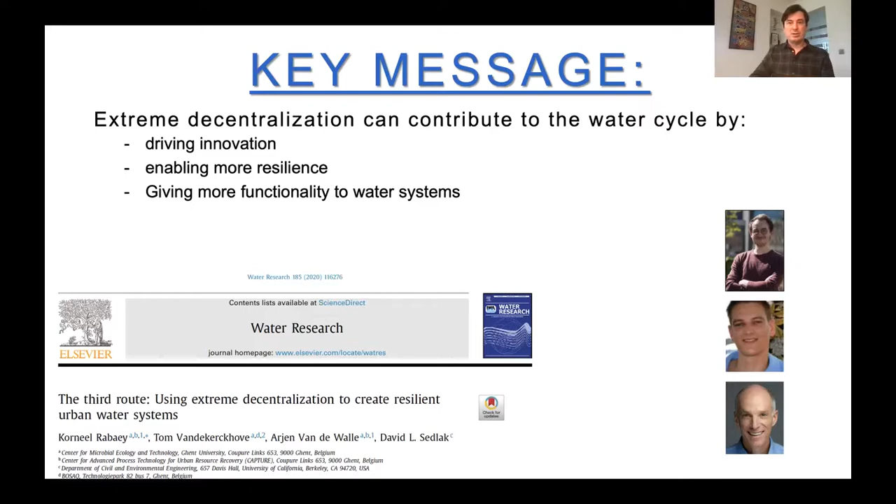Let's get started. If you think about the water sector, and if you're a technologist, in many cases you think of large centralized installations like this one—this is a very big one, the Blue Plains wastewater treatment plant in Washington.

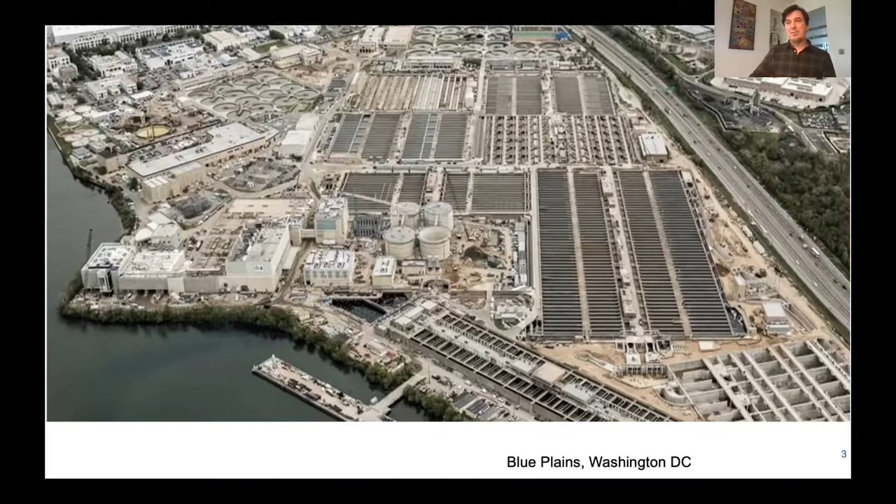Centralized systems like this were developed a bit over 100 years ago, certainly the treatment aspect, and they've been fantastic because they safeguarded human and environmental health—let's not forget that's the first purpose of water supply and sanitation. They've led to more and more efficient water and wastewater treatment, and now enable more recovery options, for example of biogas. But they lead to major investments in transport: water is moved away from where it is gained. Such projects typically have very long lead times, and they lead to slow innovation.

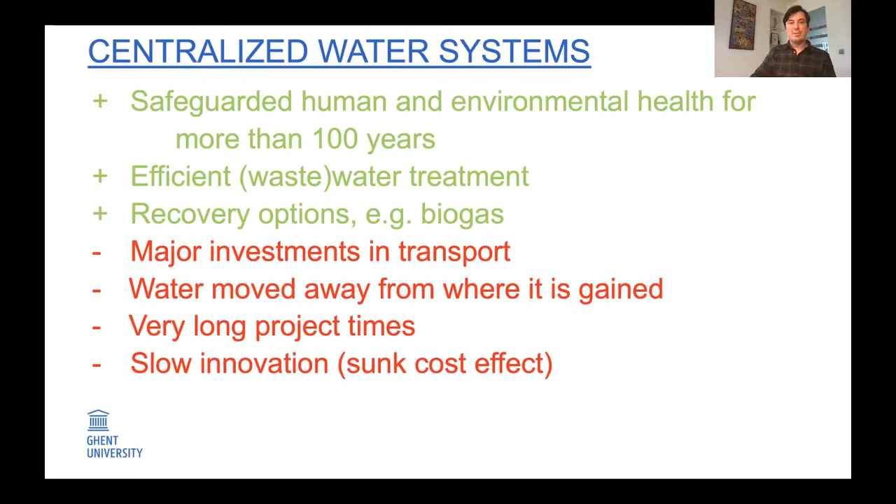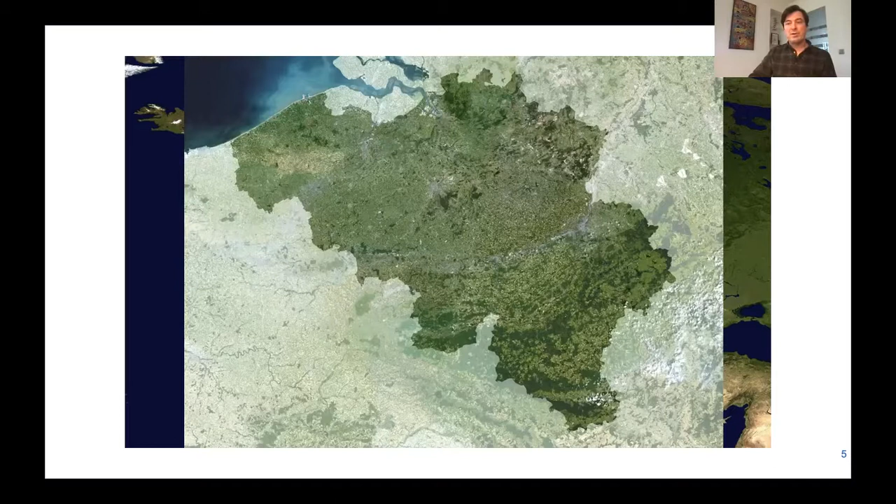I'll go a little bit more in depth on these points. If you take Europe, where I'm located at the moment, and a tiny country like Belgium, we already have many challenges in terms of water. Just the small north part of Belgium, around 12,000 square kilometers, has sewers to transport this water around. Here you see Cloaca Maxima, by the way—this is in Rome, the oldest known sewer.

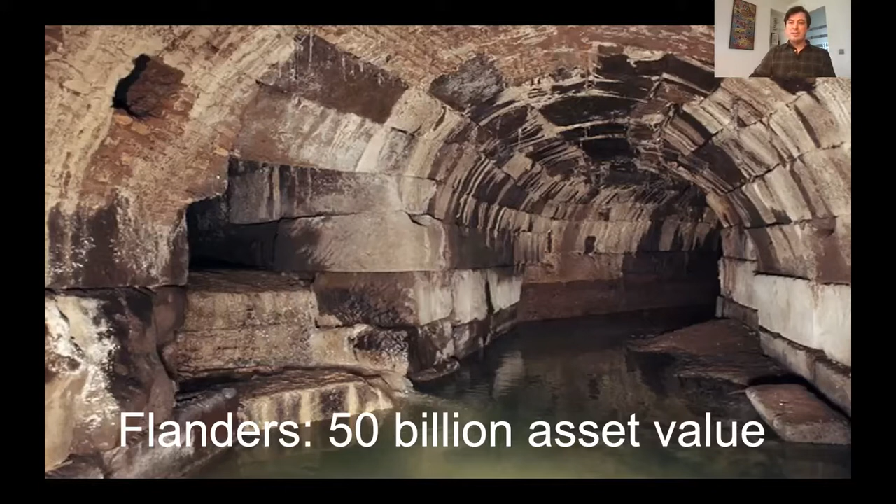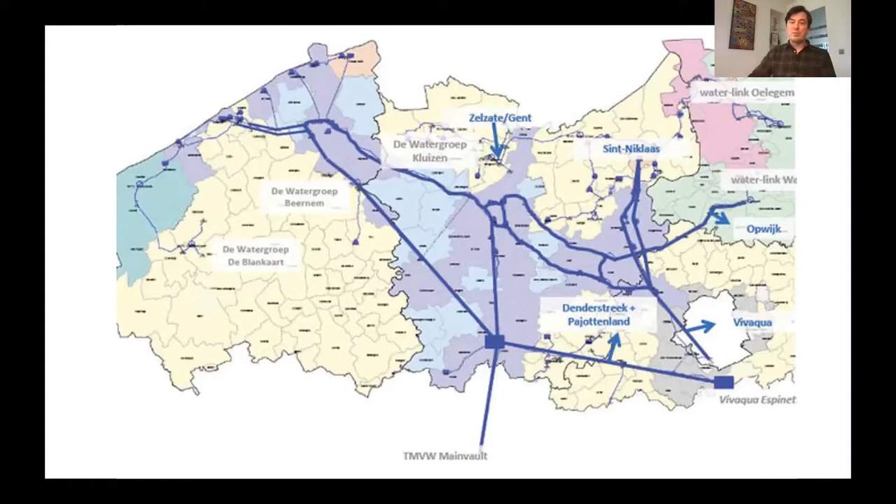They tend to look a little bit more modern in Belgium nowadays, but the invested capital in sewers just for the small Flemish region where I am is over 50 billion euros. That's a lot of concrete underground. And similarly for water supply, in order to get more robustness in our system, we are increasingly connecting within our area, within Europe, water systems, large piped networks.

So water transportation, to enable more robustness in a general grid, is not necessarily a good thing. Potable water is often transported well over tens of kilometers. You use that potable water and rainwater on site, and typically after use discharge it. The wastewater is again transported over kilometers to a centralized wastewater treatment plant typically, and then it is discharged in the river as a point source, almost like a factory.

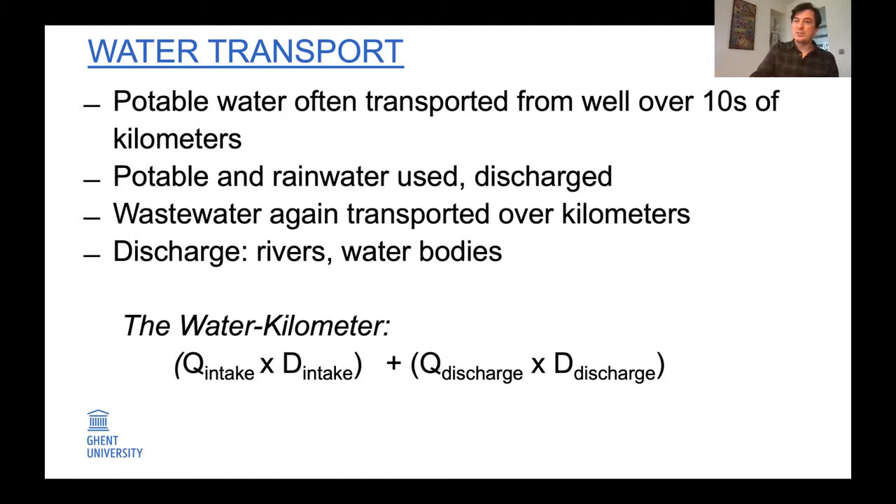So the transport moves the water away from where it is gained as rainwater to where it's in the end discharged. And this has an impact, an energetic impact, and an embedded impact of these pipe networks. This is why we're starting to think about parameters such as a water kilometer, to quantify for the incoming water over how many kilometers you have transported it, and for the water that comes from a building, a house, a factory, over how many kilometers you transport it away again to be treated and discharged.

Now, on another note, the centralized approach also leads to very large investments within a single project. And as a result, although the water sector finds itself quite innovative, I would dare say that we are actually a slowly evolving sector.

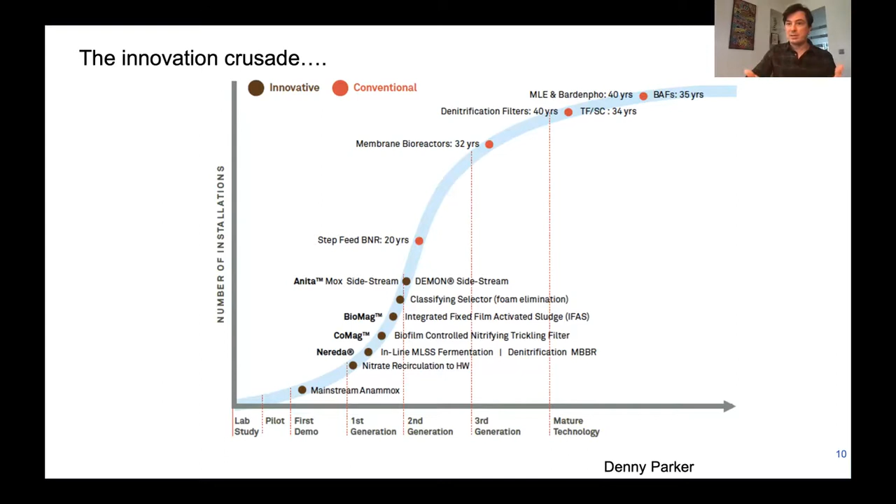Here you see a nice graph made by Denny Parker, in which he mapped out different technologies over time, their maturation from lab development all the way to a mature technology, and how many installations you have. You see it can easily take 30, 40 years before a new technology in the water sector is really mainstream. And that has to do with the very important decisions on large-scale investments associated with, for example, putting on a whole new wastewater treatment plant.

Now, in many places in the world, this is not yet a consideration even, because pipe networks for water and sewer networks may not exist. But also in these cases, the transport of water produced somewhere in a centralized facility to the user can have a large impact. For example, in Kenya, it's calculated that water delivered by a truck can require almost 10 kilowatt hours of energy per cubic meter, which is far larger than the normal energy investment to produce tap water.

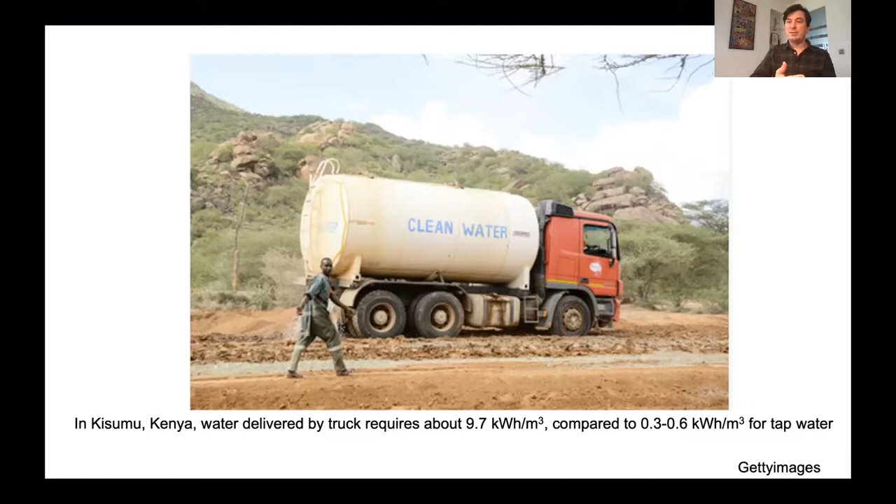So obviously, a solution to this is to develop more decentralized technology that locally produces water, treats water, and thereby avoids the transportation costs. This has, particularly for developing countries, been a very popular approach. So I am not reinventing an approach here; many books, much literature already exist, many implementations for local water production, local water treatment. There are also programs such as the Gates Foundation Reinvent the Toilet Challenge, where we go one step further, where really localized, fully integrated treatment systems are under development.

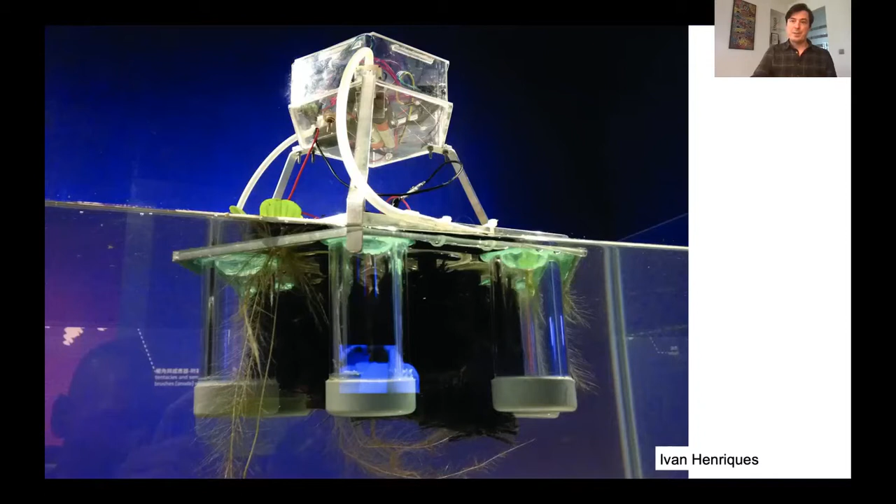Now, what I like about that Gates Foundation approach is that it forces you to think. You think in terms of challenges on where you want to be, rather than starting from existing technologies. This is very similar to me as to how an artist works. We are very fortunate with our team to work with artists. Here you see, for example, a robot that is powered by the waste that is in water, to float around, to move around and clean up more water. Similarly, a beautiful design by Teresa van Dongen, another artist we work with, where a lamp is powered by degradation of organic matter. So artists come from a perspective of where they want to be and design for that.

While a risk that has come through our development of centralized systems is that we think according to what they call the sunk cost effect. We are so attuned to large-scale technologies that actually, if we think about decentralized treatment technologies, we tend to just make smaller technology of what already exists. But it doesn't need to be just smaller technology, and similarly, decentralized technology doesn't necessarily need to be the cheap or cheapest technology, because decentralized technology can have also other purposes relative to centralized technology.

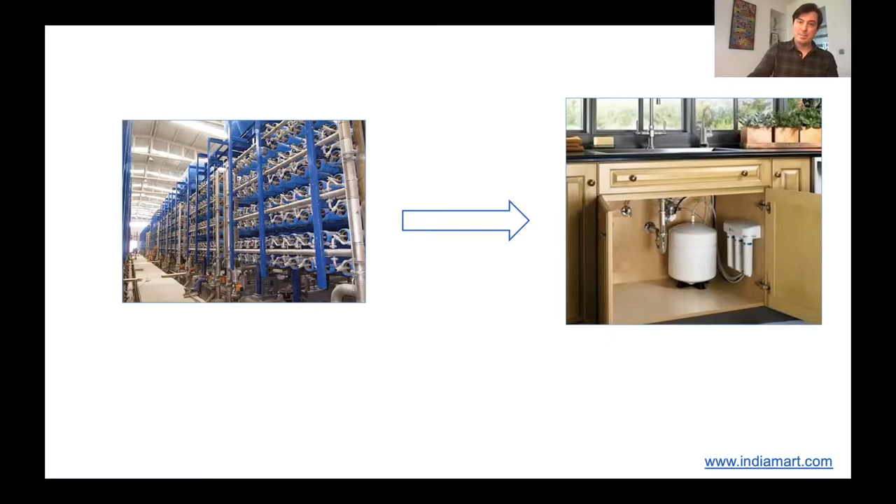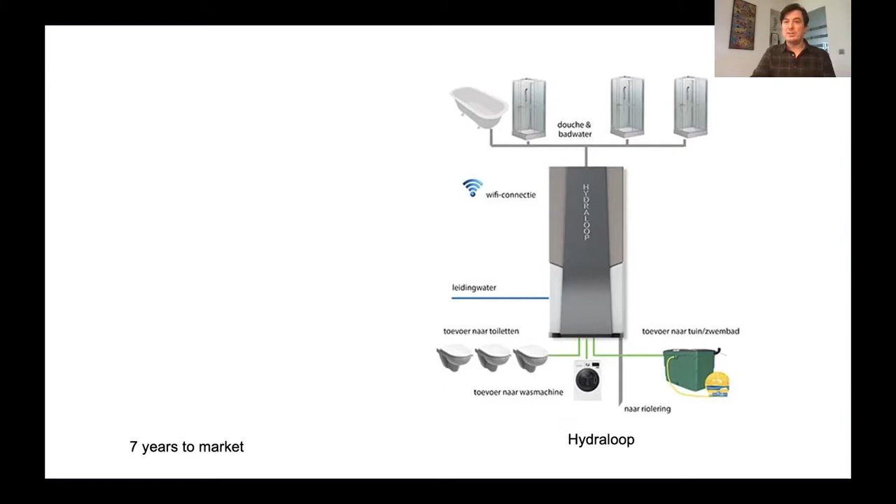Not working on drinking water, but on grey water. There's this example, the Hydraloop system. This is a Dutch company that develops a quite straightforward reactor that takes the grey water in a house, so you need a separate pipe network for that, treats the grey water so you can reuse it to flush toilets or to bring it into a garden. Now, it's nice, this is a small technology, and if I get it right from the information I get from the company, it took about 7 years to get to the market, which is very different than the 30 to 40 years we discussed before. And because a company like this can roll out now many hundreds or thousands of these units, innovation may actually come very fast.

And the third point on the purpose. You see the evolution of new systems like here on the left-hand side, Robinetto, on the right-hand side, Brita. Robinetto makes a system that in buildings, predominantly, you can have a water tap. You can change the properties of the water, the flavors, the experience of the water can change. So we can work with septic tank-like approaches, which was the main sanitation approach so far. We can work on grey water, and we can work on drinking water with small-scale technology, which admittedly today is more expensive.

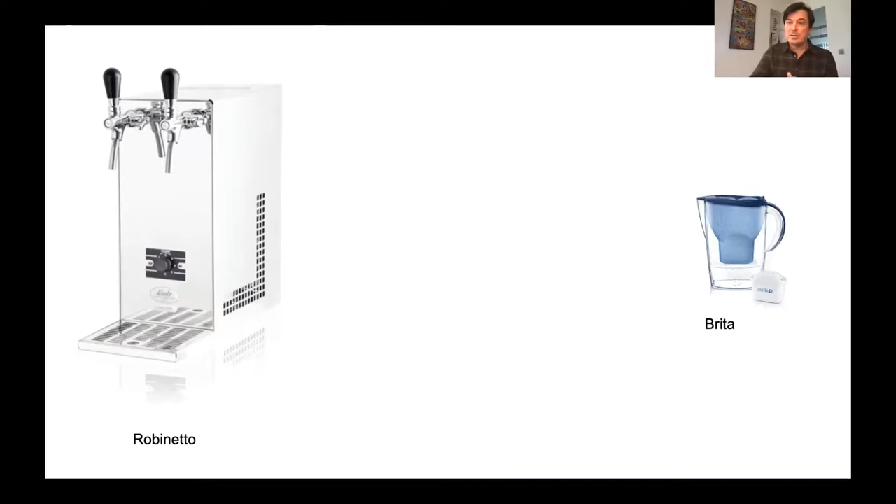But you can wonder what the willingness is to pay for the customer. Now, an important thing in willingness to pay is also where these water systems at a decentralized level will bring you. And I want to talk a little bit about unpublished work of our group, of Arjen Van de Walle, where we've actually done a lot of simulations on home-based, single household-based water treatment systems.

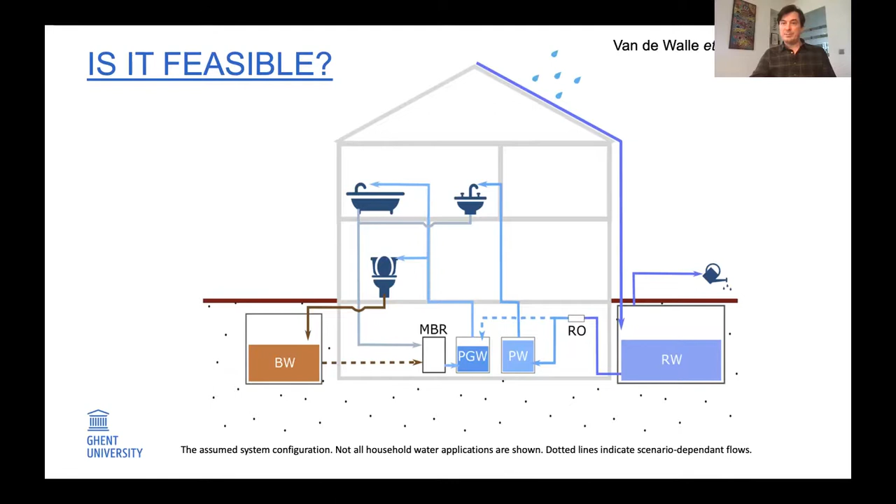And we looked at how we would be able to fully make a house water independent. And so what you realize if you go through the simulations is that if you have some storage, you can quite quickly produce a lot of water in the house because you have an input of rainwater and actually quite good technology to reuse already.

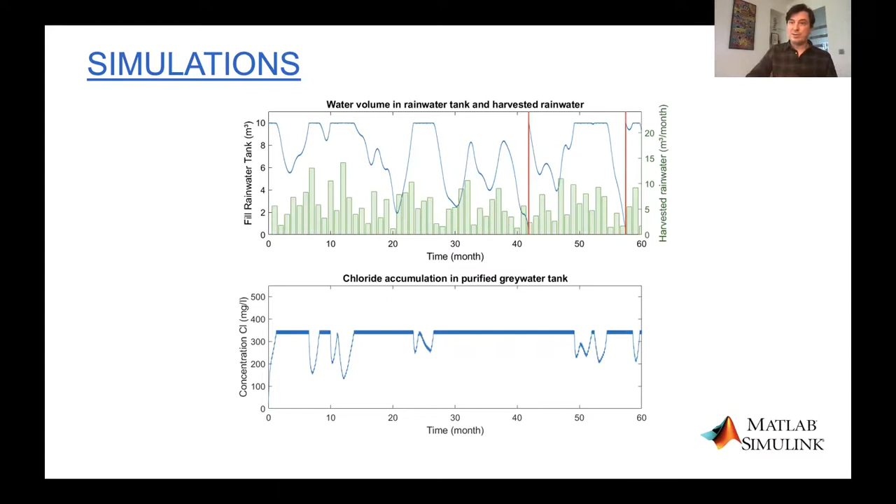Now, one thing is that if you start doing these calculations, you see new challenges coming up. If you're going to reuse water at home level, contaminants may accumulate. For example, here you see over time, in the bottom, the chloride concentrations in water if we start reusing it.

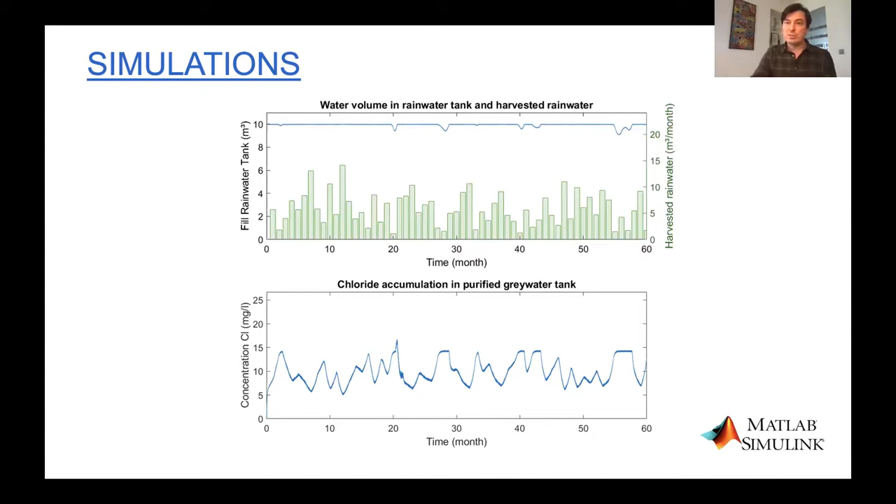And we reach a limit of about, well, a standard of about 350 ppm quite easily, making the water less suitable for use. But if you do more interventions and start purging excess water, you have to get rid of water anyway from a building, then you can see that you can maintain very low salt concentrations and deal with contaminant accumulations over time. So even with a quite small buffer tank here, we managed to, at least in silico, close a water cycle at single household level.

And then you can start creating performance indicators. We can say, how independent do we make this house? An independence factor. How circular is the house in terms of water? How much do we recharge to our local environment of that rainwater that initially fell on the house? And how tolerant are we to extended drought periods? And this allows you to compare systems and to start really making an assessment of how robust, how resilient our water system is getting through such interventions.

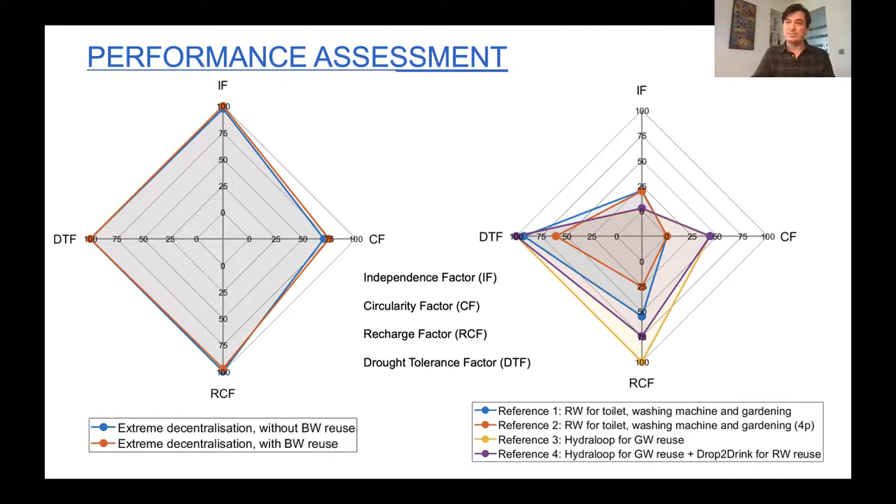We're not there yet. We have a long way to go, I believe, before homes would, in an economic way, be water independent. But to get there, we can learn a lot from other transitions. I've already discussed that we have to learn also to think differently. A smaller technology is not necessarily the same as a larger technology.

But we can also learn, for example, from photovoltaics, where the approach to work with very small panels and then roll out millions of panels through a very well-planned strategy led to very fast decreases in the cost of photovoltaic power. And similarly, you can anticipate the same trajectory if we have the vision for small-scale water systems.

Important if you want to get the societal drive for such smaller local water systems is also that you have to engage with the customers. And the first customers who buy systems, they invest in sustainability or another aspect, and they want to be recognized for that. A system has to be visible in order to be successful in a first phase.

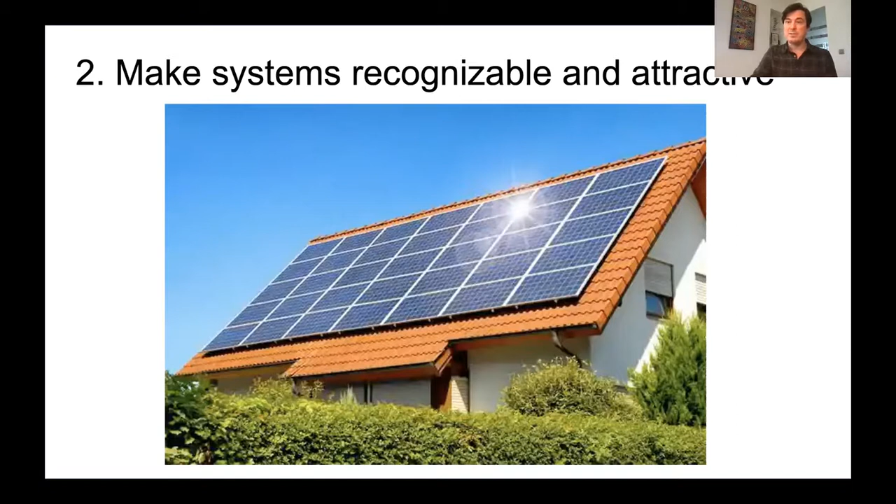But water systems also need to come closer. Water is a very intimate product. This allows you to actually communicate via your water system with the user of the water system and engage that user in also developing your system. This is what is called customer-driven innovation.

Smartphones are a very nice example of that, because when you buy a smartphone, you interact with this device and think of new good solutions, applications of this system. You and others are able to make new applications via apps on this platform that create that extra functionality. So we can think in the same way about water systems. Can we have consumers closer interacting with their small water system and thereby contribute also their creativity to it?

Very important also, if we are going to work decentralized, we should not be trucking around large amounts of chemicals towards the different treatment or production sites. We will have to go electric. Going electric minimizes chemical addition to the water, minimizes residues, but is also becoming very cost competitive.

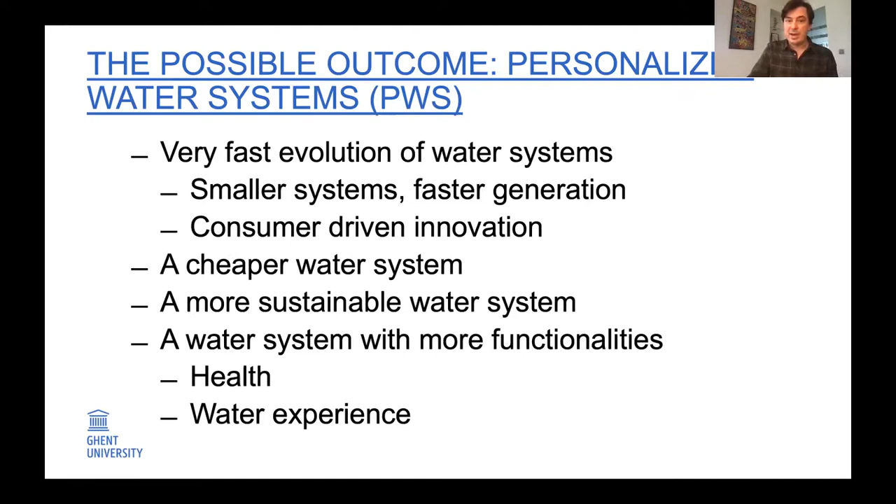Aspects such as adding pre- and probiotics to the water, tailoring the water, for example the mineral content of the water, to the user's taste or health requirements become feasible. And you can also address new expectations on the climate footprint of your water system, and you can really turn it into a consumer product—not the kind of nonsense of electrified water of the past, but truly water that has health-promoting benefits.

Logically, you'll have questions with this. Is this safe? Well, I think there's going to be a presentation after mine on water and data. We will have to monitor smaller systems, but it is possible now, via the Internet of Things, to monitor small-scale installations, and bear in mind, if an installation fails, the scale is very small.

You may wonder whether this approach is ethical, because yes, more affluent people will get better water, whatever that means, at least in the first phase. But photovoltaics shows that principally such an evolution can be ethical if, in time, these photovoltaic panels, those water systems, become available for all at an affordable price. It's a bit similar to behind-the-counter services for which people are already making choices.

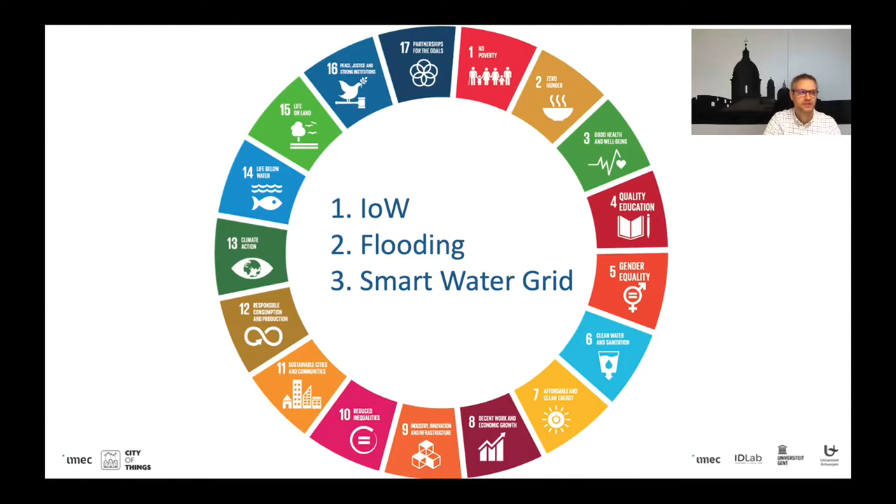Now all 3 projects, the Internet of Water, flood prediction and smart water grid, fit into several of the United Nations Sustainable Development Goals: clean water, responsible consumption, sustainable cities and climate action, to just name a few.

Now, the first project is a project of the City of Things Living Lab of imec. On the photograph, you see a bird's eye view of the city of Antwerp, which harbors one of the biggest ports in Europe. In a dedicated area of the city, a few square miles wide, we rolled out a living lab, which is called City of Things, to test all kinds of IoT related projects.

Within this living lab, we are using digital technologies and researching the way in which the Internet of Things technology can provide solutions to cities and regions for any urban issues. One of the projects that fits this is the Internet of Water.

At the moment, there are major water problems in Flanders due to climate change, as it is the 4th year in a row that we have a drought crisis in summer. Over summer, the drought committee is constantly discussing whether the orange code will apply so that governors can take measures themselves and invoke a water capturing ban for all citizens.

Now, in order to better deal with such problems, a fine-meshed measurement network is needed so that evidence-based and well-founded decisions can be made. In this Internet of Water project, we mainly worked on salinization and discharges into surface water.

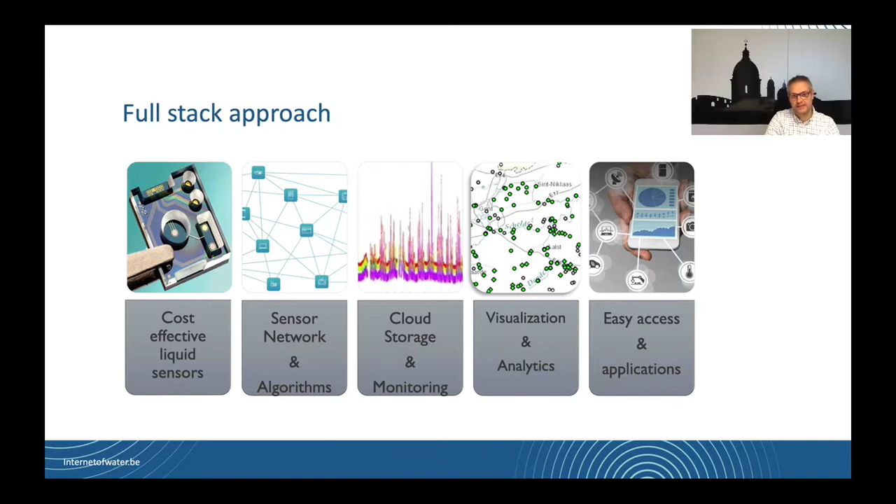Let's go quickly through a number of working groups that fuel this project.

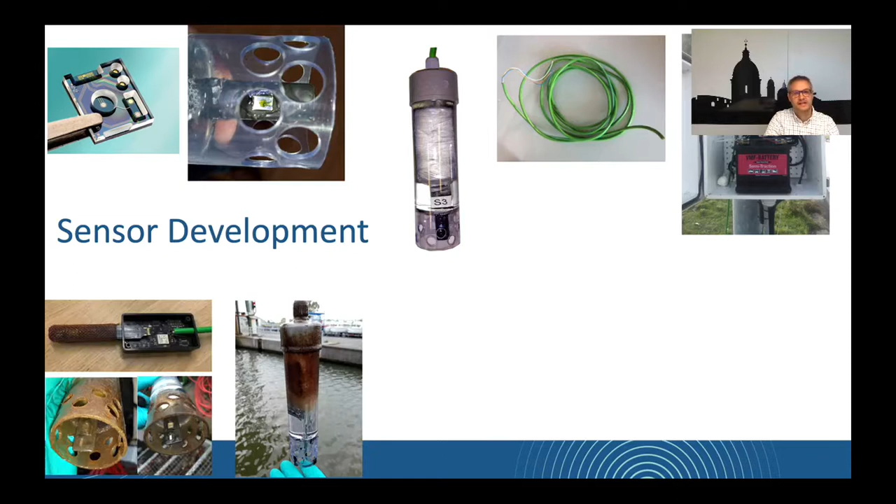So what kind of sensors do we use to develop and test the different kinds of housing? We use conductivity sensors, temperature sensors, acidity sensors, and ultrasound sensors.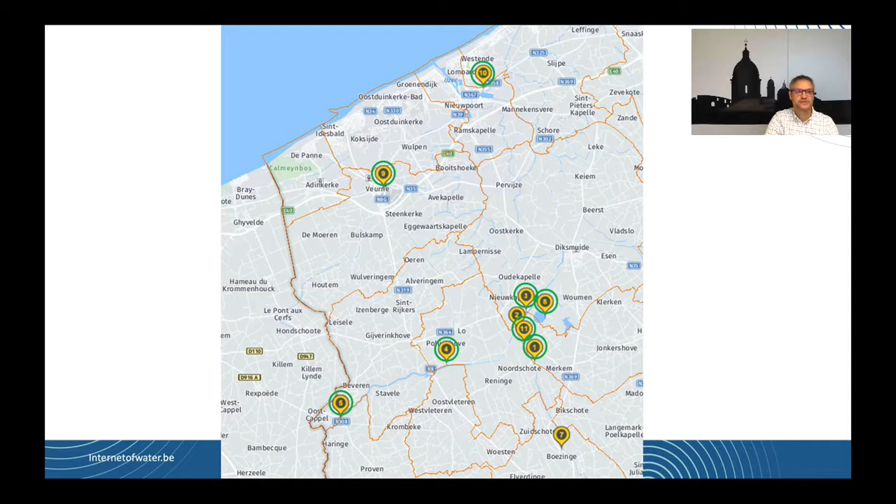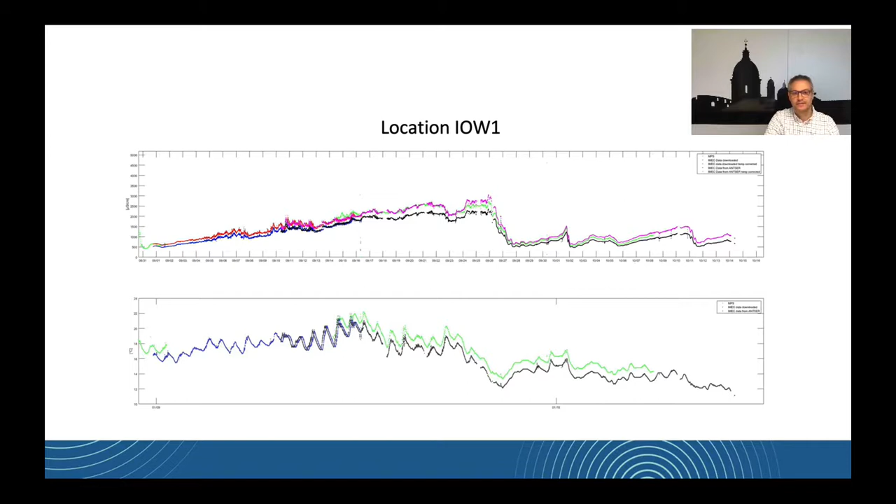Here one can see sample readings of both the conductivity and the temperature sensors at different measurement venues.

Now, how do we deal with IT infrastructure and models? The work group IT indicated what components and functionalities were required for such an IoT platform to work end-to-end.

We need an IoT agent, which is based on the NGSI proxy agent. We need a context broker. We need a time series database for the sensor data, a metadata management platform, for example, to put the location model in. We need different APIs.

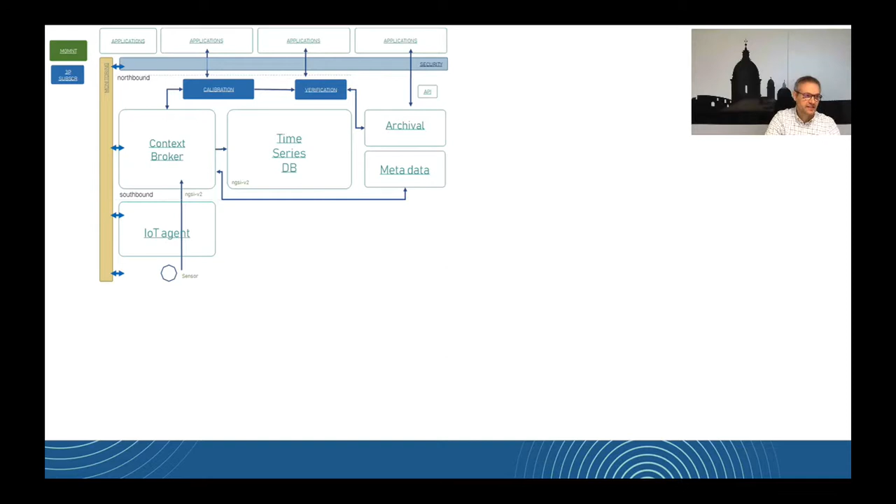We need verification of algorithms for drift countering, and we need some basic authentication and monitoring building blocks. The approach is aligned with the principles chosen at the start.

So the context management, the metadata and device info is needed at the beginning of the chain, and in the end we link it towards European approaches as a basis for the data-first strategy as defined by NGSI, amongst others, with this CEF context broker.

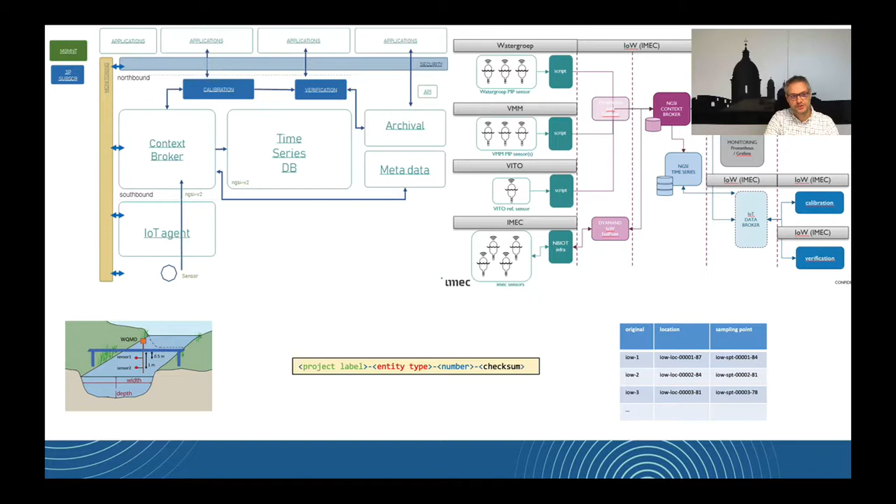Now, how do we test and install stuff? We started by determining a number of locations to conduct our first test. These were determined in consultation with the consortium, and we included different location types, both surface and underground water.

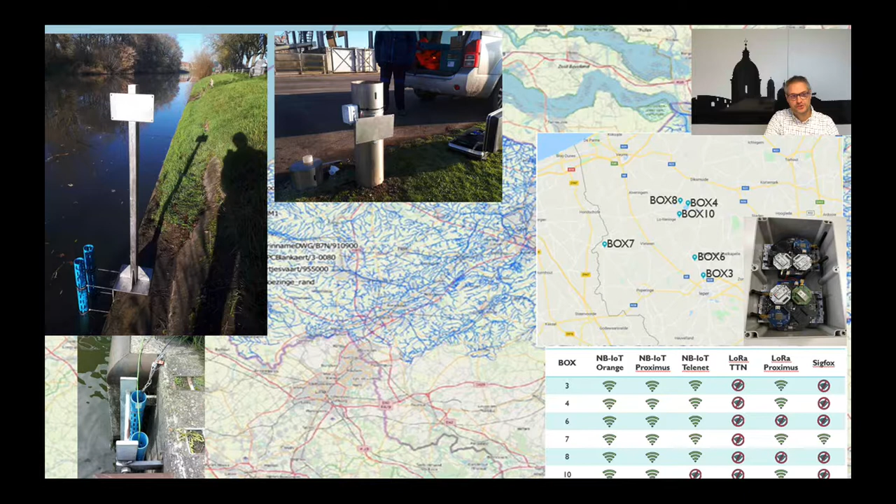We are using two sensor tubes each time, one with the new imec sensor and the other with some reference sensors. And we applied the same general operational procedures on all sensor venues to set up, calibrate, measure, and clean the sensors.

Communication and stakeholder management. Well, there the usual suspects for dissemination are used: conferences, website, newsletter, Twitter, LinkedIn, and we have also a dedicated YouTube channel.

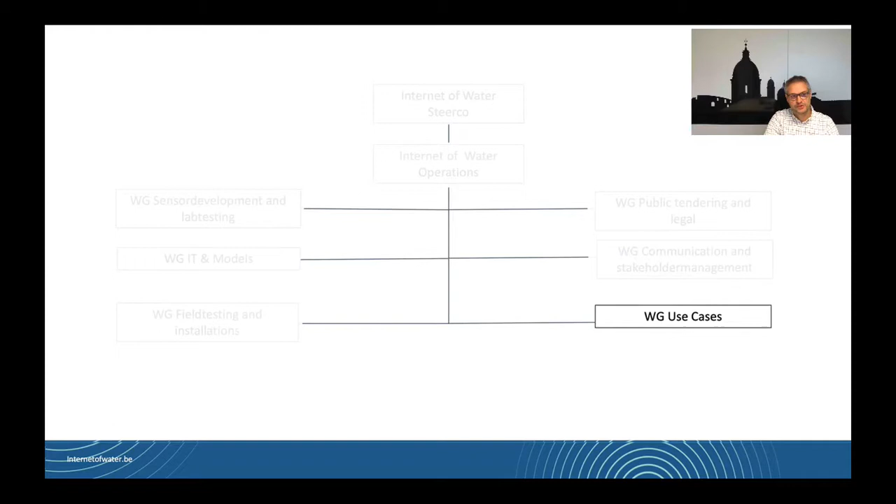Now, what use cases have you already worked on? Sensor locations are being defined in collaboration with the consortium, as said, but also with a broader group of stakeholders.

Now, based on these conversations and the input from the consortium, an approach has been defined to create a first list of locations, which is based on two criteria, namely general technical criteria and specific use case criteria.

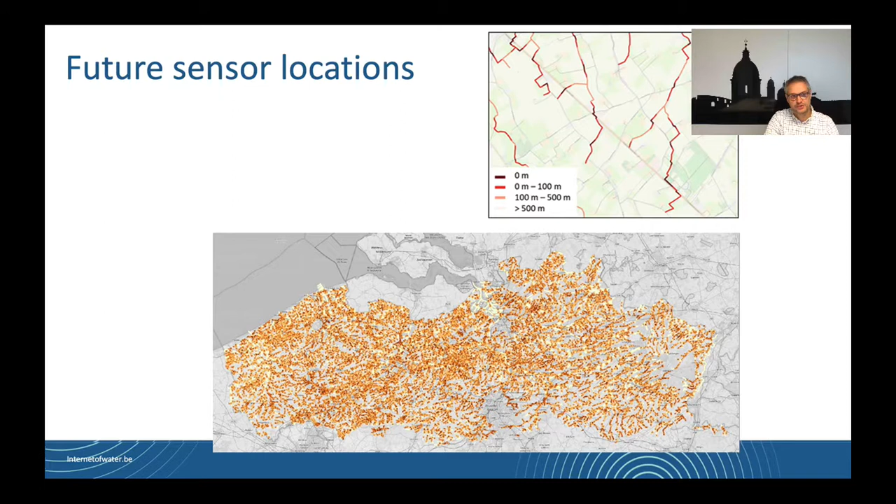For the general technical criteria, we got input from the Internet of Water partners. Namely, we primarily asked ourselves, where can a sensor best be placed? We made a relative ranking based on technical suitability and accessibility, and also the accessibility of the mobile network coverage for needed data transfer was very important in determining where to put the new sensor locations.

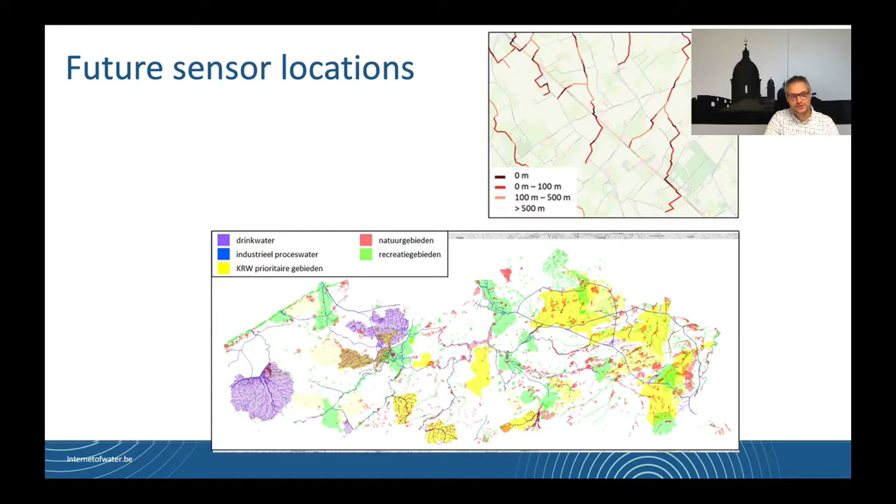Now, there's also use-case-specific criteria. Again, input from the Internet of Water partners and stakeholders was taken into account, and some relevant, meaningful areas of locations to measure what we want to know. Also, what do we want to measure for what reason?

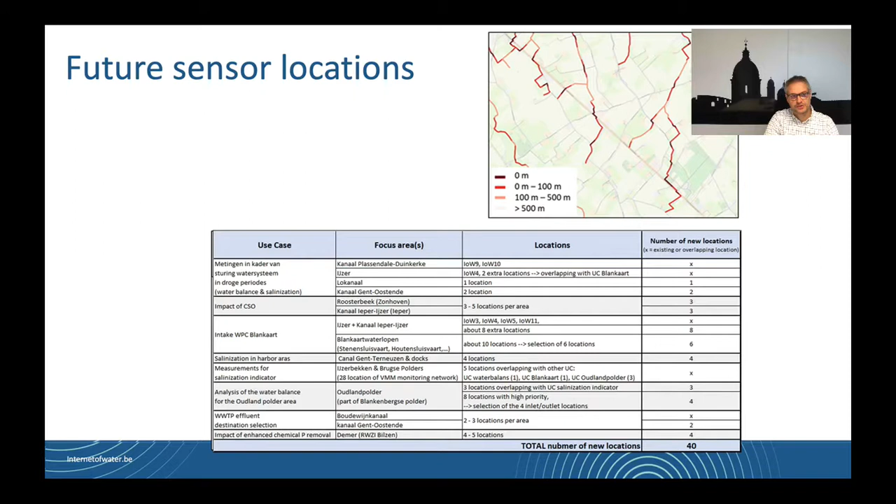And again, we made a relative ranking here based on substantive suitability with a focus on the use case of salinization and discharge in surface water.

Here you can see that we use machine learning techniques to move from point measurements to predictions of river water quality. This example illustrates how we can deal with data from Internet of Water, for example, to create a dynamic salinization map of the coastal region.

The dynamic salinization map shows how salt water from the sea flows into and retreats from the hinterland throughout the year. In the summer, the salinization problem, the intrusion into the interior, is greatest due to the drought, of course.

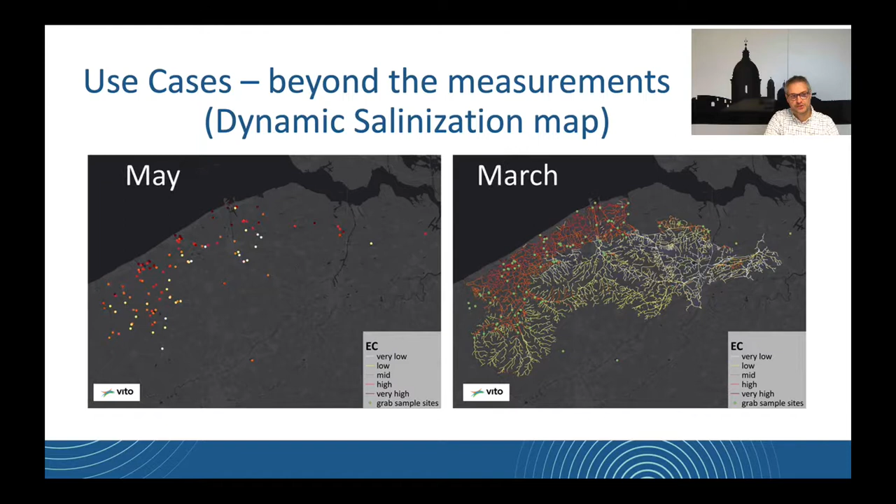The predictions here were trained on the basis of existing stakeholder measurements from the year 2019. Imagine what we can do if we can have hundreds of sensors in this region to supply us the data towards our developed digital twin for predictive simulations.

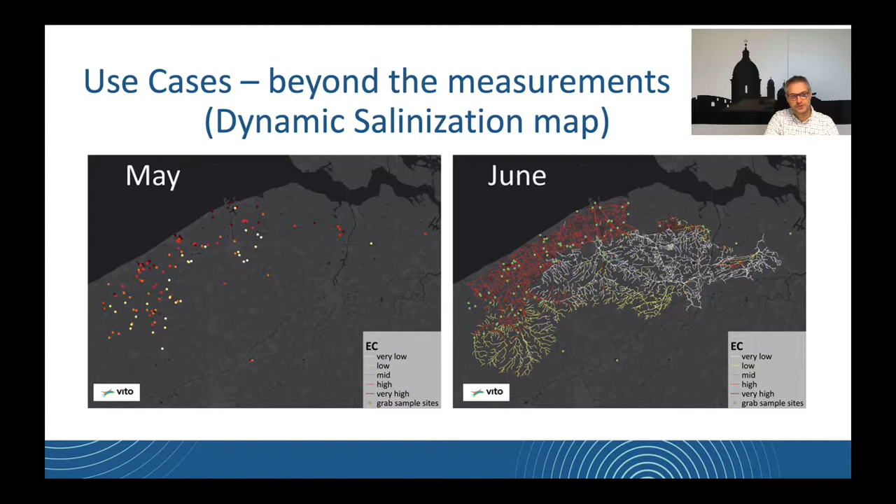You can find more and the latest info on the Internet of Water project on the aforementioned website.

Now on to project number 2. The same city of Antwerp is vulnerable to flooding, as most of the ancient city lies below the harbor waterline and is only protected by quays and some storm surge barriers. But every now and then there are exceptional big storms that bring extra high waters from the sea to the river Schelde, called storm tides, and flooding is very much possible then, certainly if also heavy local rain adds to the problem.

So the objectives for the different stakeholders are the following. For the fire department, we need fast and correct 3-hour estimates of the water level on street level. And for the sewer department, we need proactive monitoring of sewage data and corresponding pumps to stop working at the event of a calamity.

Now, based on real water levels in river and sewer system, and on top of that, we also need real-time rainfall sensors. Our algorithms process these real-time fused sensor data streams together with historical data on calamity events and their corresponding sensor readings. And of course, we also use the forecasted rainfall from the national weather radars.

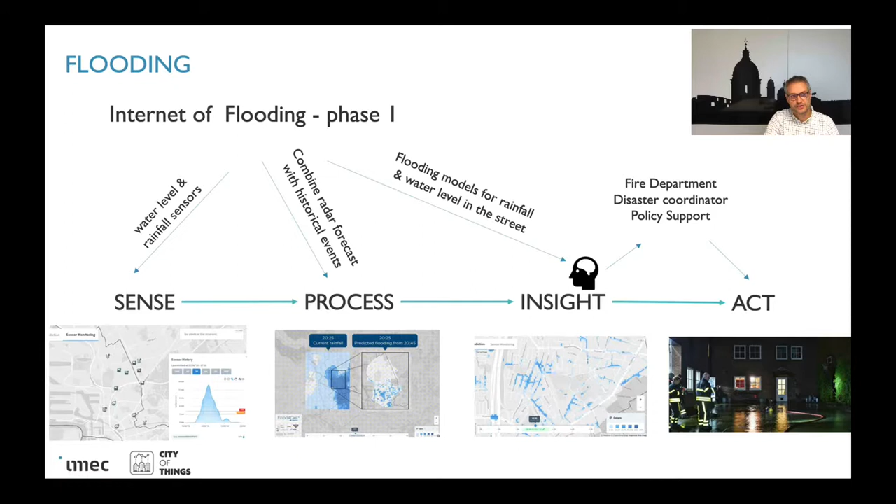Now, to provide predictive flooding models and water levels in the street for the next 2 hours, these algorithms are needed. Thus, the needed disaster teams of both fire brigade and sewer management company can act in a timely manner if things happen.

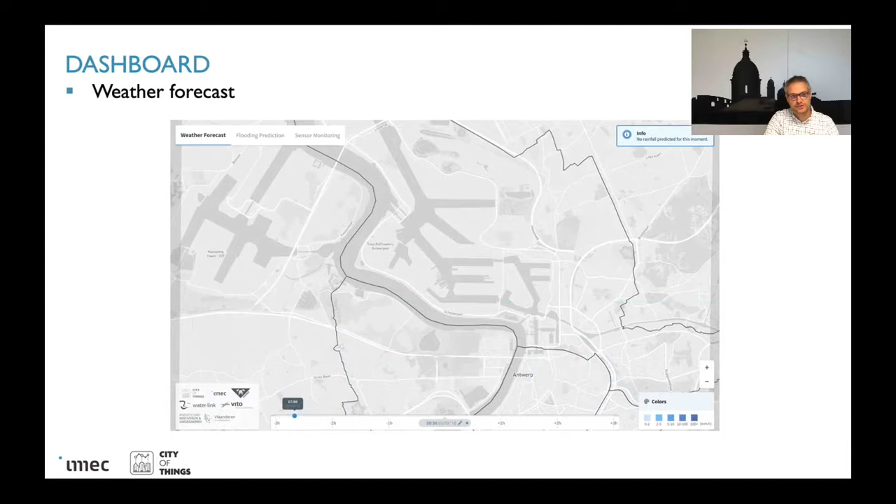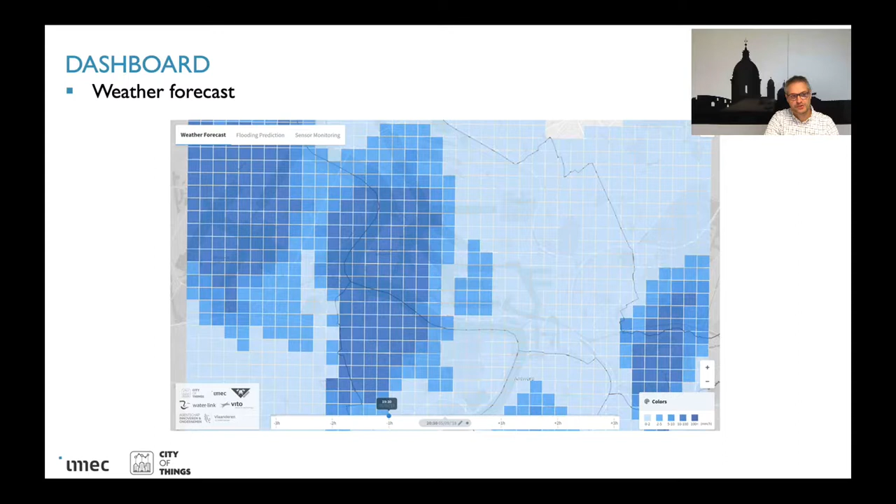Now, all the info ended up in some visual dashboards where both weather forecast, flood prediction, and sensor monitoring are combined. This, for example, is the estimated amount of rainfall in millimeters to be expected in the next 3 hours, which in turn gives an input to the trained flooding models, which in turn predicts where problems might occur on street level during the next couple of hours.

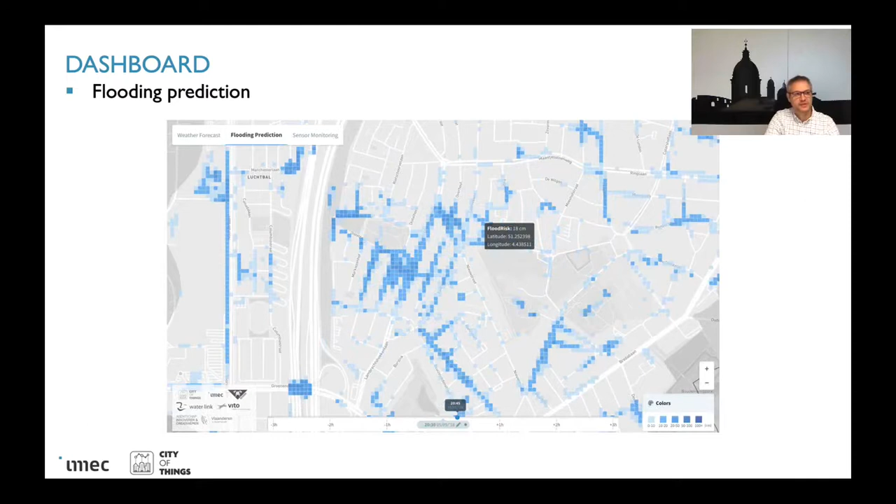As you can see here, the more blue it is, the more chance it is flooding will be there in these streets. As you can see, in this street, 18 centimeters of water is expected 30 minutes from now, based on all the sensor readings and the data at hand.

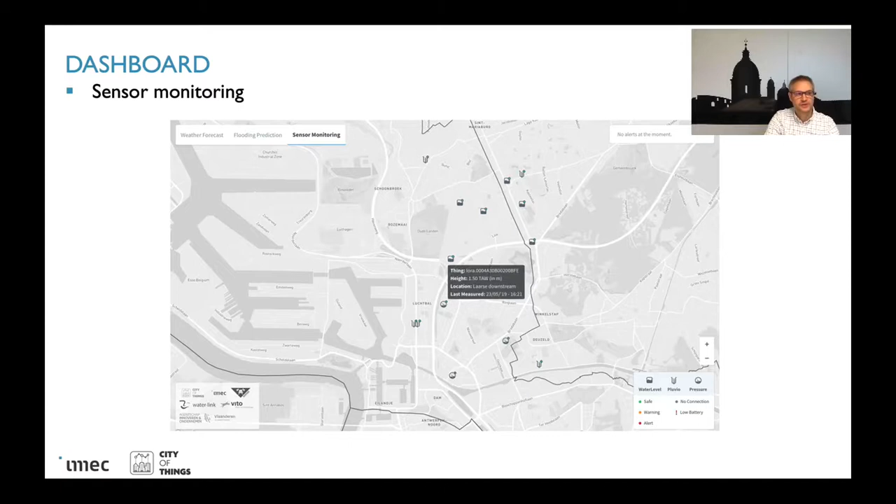As an added feature, also the current status of all the sensors can be monitored as well with the same backend of our system. Here, the pressure sensor is currently doing all right, but history shows water levels were higher than normal the last couple of months in this particular measurement point.

Phase 2, there we will model to predict proactively the impact of showers in the street over 3 hours over the complete operational zone of Antwerp. And this will include modeling with feedback, namely, what can we learn if we compare the data of the application with the data of the real historical interventions? Is it possible to not only predict the impact of water, but also the impact on the citizens? And are there more predictive correlations that arise?

Furthermore, we will be able to fine-tune the thresholds for preventive alarming based on the impact on a certain area rather than the intensity of the showers themselves. Also, research on how the output of the model can be used to determine external communications around floods, because miscommunication can lead to distrust from the population, and this support needs to happen with very high reliability.

Last but not least, we will also try to link it with other city services, emergency planning service of the city of Antwerp, urban planning services, or even we link it with real-time mobility services.

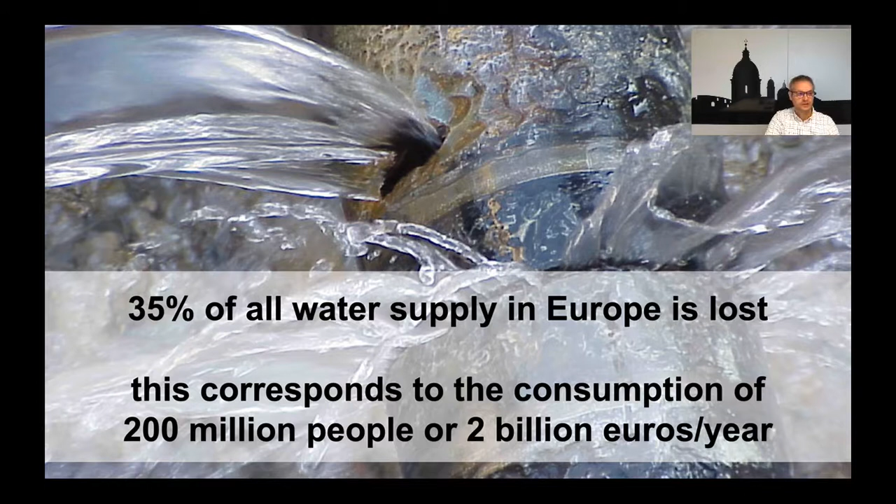You see the quote here. In Flanders, it is a bit better, but still awfully bad, as 20% of all our drinking water is lost due to underground pipe leakages. And this costs a lot. Not only that, it's not the water loss and the costs itself, but if unlucky, these leakages can lead to further damages in the infrastructure, as can be seen here.

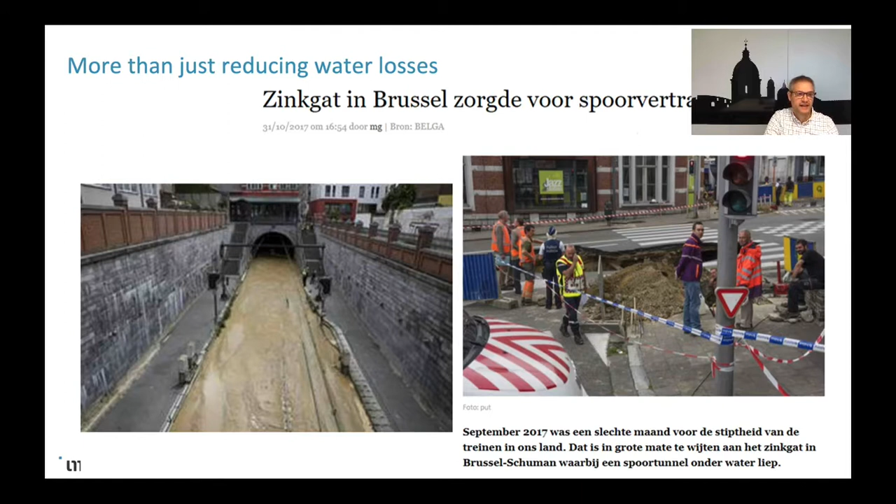A rupture of a water pipe was the reason that a train tunnel was flooded for over a week in Brussels in 2017, causing all kinds of economical, ecological, and societal havoc at the time.

Now, where are we today here in Flanders? We can detect leaks in this zone, but the alarm that goes off is for a really huge zone, 70 kilometers wide, which in worst case scenario, a lot of human effort is needed to detect and fix this leakage.

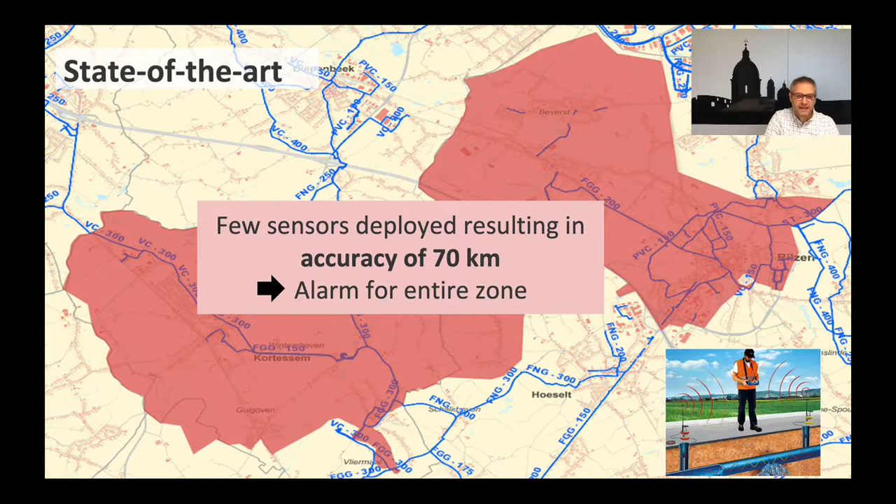It could take weeks or even months to really detect the faulty pipe. Now, if we could narrow that down to street level, which means less than 1 kilometer of piping that has to be researched, well, a lot of positive vibes could happen.

The search time to find the leak is just a matter of hours now. There's less hinderance for the end consumer. There's a faster service, there will be increased quality, and there will be increased consumer confidence in the end as well.

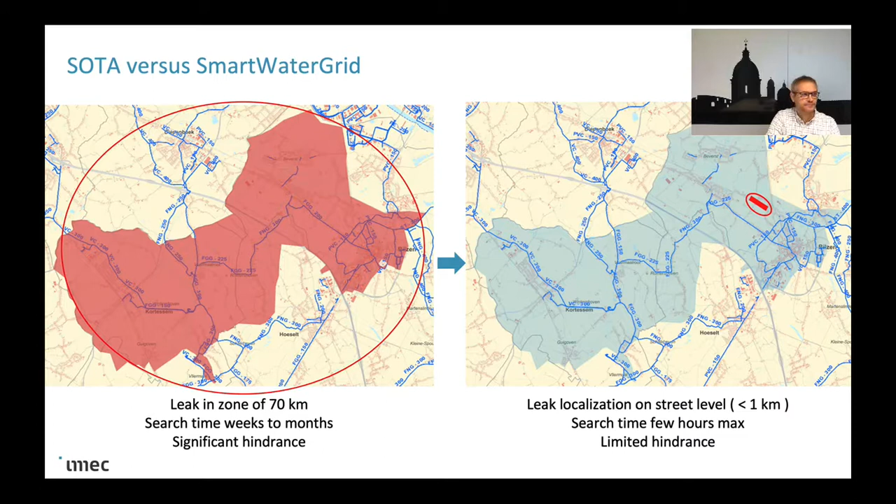Now, the solution to come to such a fine-grained leakage detection system is twofold. We are building a digital twin of the real-world situation at hand, where the AI model is fed with real-time sensor data to see if it holds to the prospective theoretical hydraulical models.

Now, these hydraulical models indicate how water flows, and their calibration is required, and it is only for one particular flow scenario. So to maintain these hydraulical models becomes very labor intensive for many scenarios. So this is where machine learning will speed this up, as it can calculate many scenarios easily in parallel. And it will make these hydraulic models also more accurate.

On the other hand, with machine learning alone, without these hydraulical models, it would require too many sensors in the field. So the combination of the two, having a hybrid twin, is really ideal and will be the real value.

On top of that, we also want feedback from the end customers that will be used as a virtual sensor to improve the hydraulical model as well. This kind of multi-dimensional hybrid twin has never been done before, so to optimize all 3 dimensions at the same time will be a challenge.

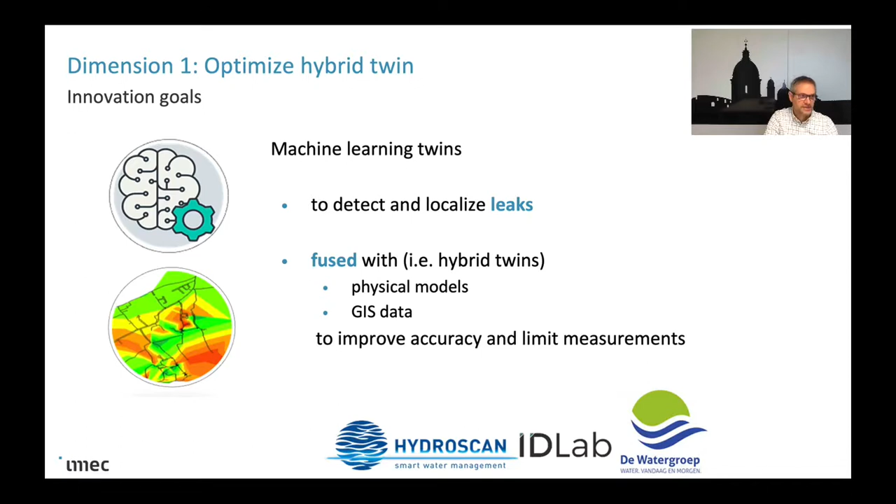As said, research dimension 1 is all about the just mentioned hybrid twin to detect and localize water leaks with better accuracy and with limited measurements needed. A second research dimension is about developing new wireless sensors to better fuel this hybrid twin with real-time data about conditions of the water pipes.

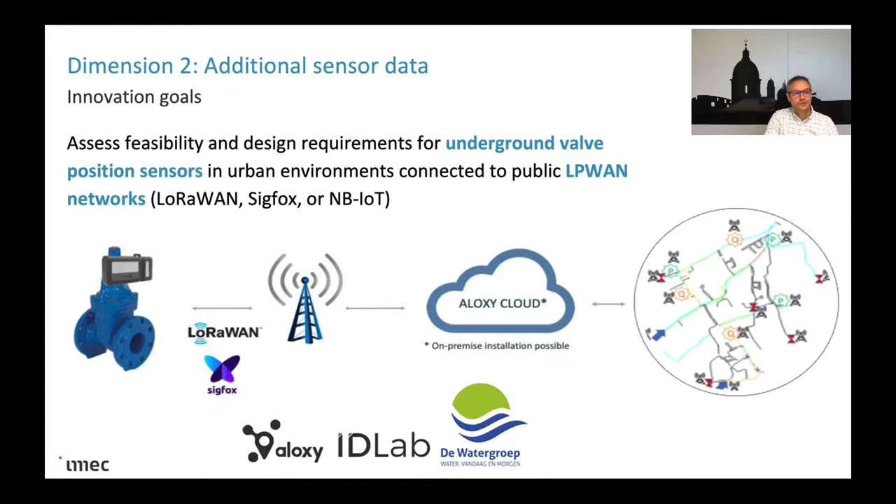Here we will investigate how wired water sensors can be adapted to communicate wirelessly using LPWAN technology, including potential pre-processing in the edge and optimizing operating parameters for such sensor networks. There we will use Aloxys technology to build this LPWAN water valve position indicator and estimate the flow rates in the water pipes. And third and final research dimension is providing feedback to the hybrid twin to further fine-tune the predictions, which in the end will lead to better connected field services and a better customer service.

What do we mean with better connected field services? Well, there, smarter workforce planning based on severity of the leakage and quality issue can be taken into account, or predictive maintenance based on machine learning. Their economical loss of the leakage versus cost of finding the source of the leakage will be taken into account.

And furthermore, we will develop a technology platform where smart meters as components in the smart grid are directly connected with this field service process. For better customer service, there, how to deduct the leakage and water quality data to individual impacted customer accounts and their smart meters, or we could also use or develop a business rule engine to proactively inform our customers in the real world together with these smart connected meters.

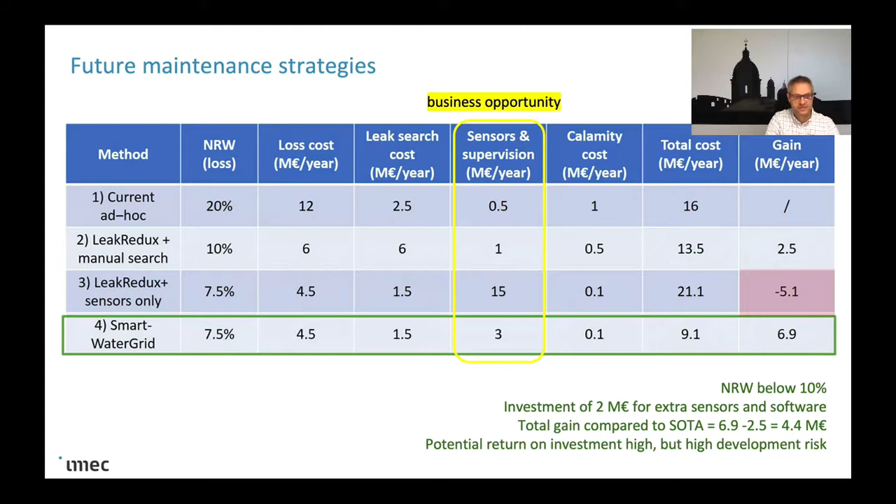So compared where we are today, we have 20% of water loss, costing society in Flanders roughly 16 million euros a year. Now, if we go to our solution, the smart grid solution, it will bring back this loss from 20% to 7.5%. Okay, it will still cost the whole solution 9 million a year, but we already gain plus minus 7 million euros a year if we can deploy this solution.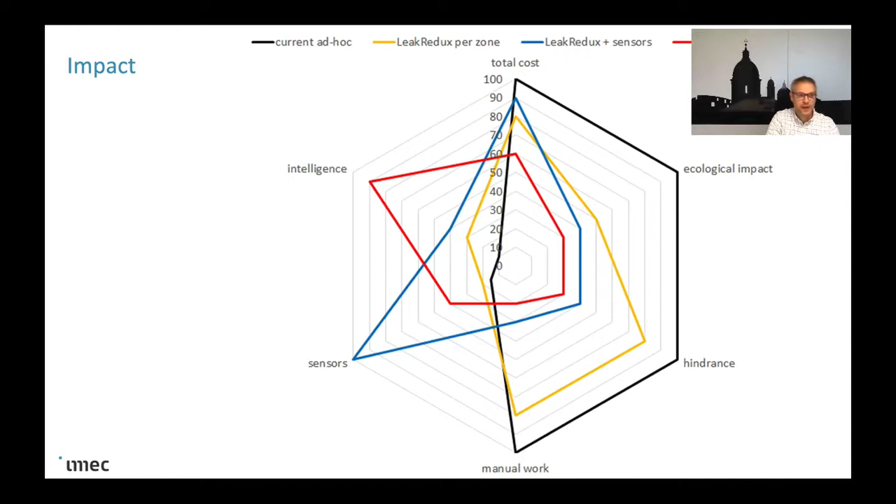Also, the spider diagram shows a minimum of surface if we take our smart water grid solution compared to these 6 possible variables.

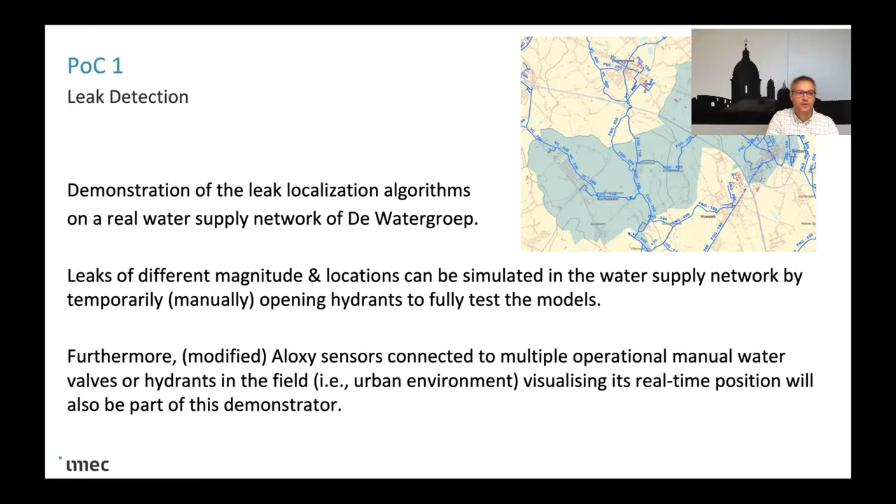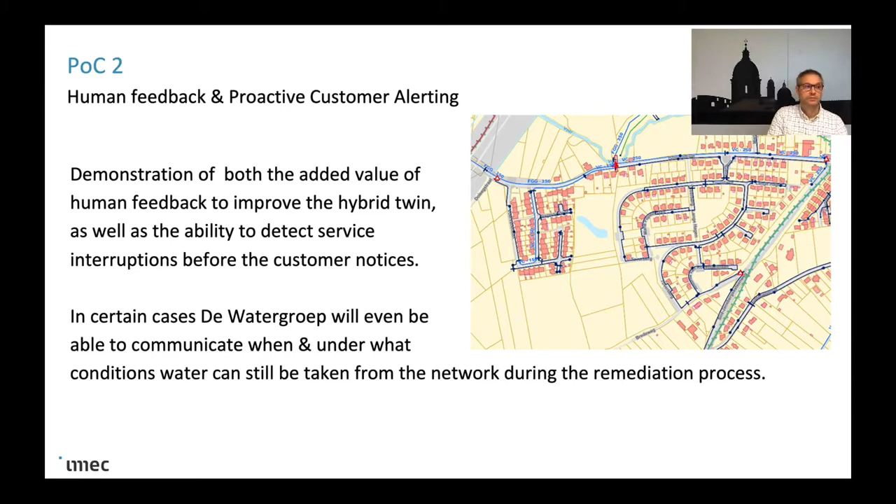2 POCs are being delivered. The first POC will be on smart and fast leak detection on a 1 kilometer range. And the second POC will be on proactive customer alerting, given that, of course, POC 1 is successful on the sub-kilometer leak detection deployment.

Now, as we have seen in all 3 projects, water is a scarce product that needs to be handled as good as possible. So it can make a difference in society on multiple sustainable development goals. Now for me and imec, I have hoped that I have shown you that IoT together with AI can also make the difference.